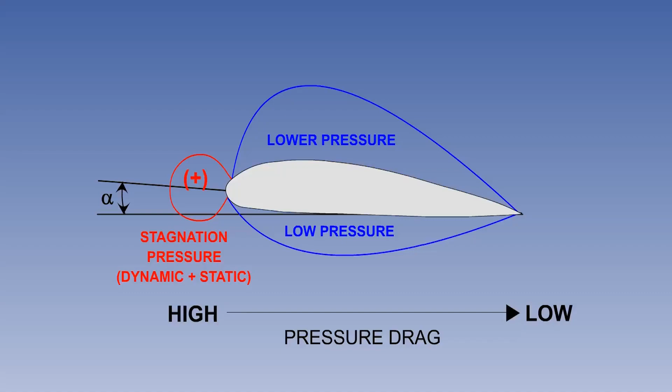We can now examine what happens to the pressure pattern as the angle of attack changes, starting with low angles.

With an alpha of -4 degrees, the drop in pressure is the same above and below the section. There is no differential, and therefore no lift. This is known as the zero lift angle of attack.

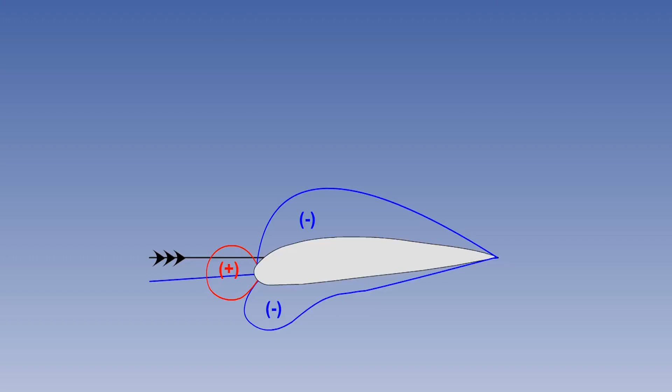At 0 degrees alpha, there is a pressure decrease over the upper surface compared with free stream flow, with a smaller decrease on the underside. Even at small angles of attack, between -4 and 0, a positively cambered section will produce lift. The positive pressure at the leading edge is dynamic, or in this context, stagnation pressure.

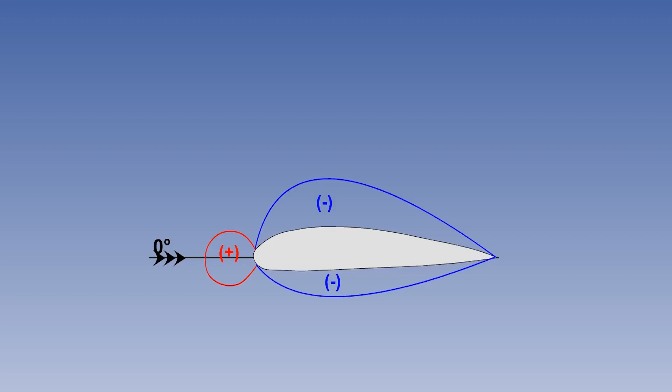As angle of attack is increased, here to around 4 degrees, the lift force is increased because of the greater acceleration of the upper surface flow in the reduced cross-sectional area of the local stream tube. The low pressure peak moves forward as the angle of attack increases.

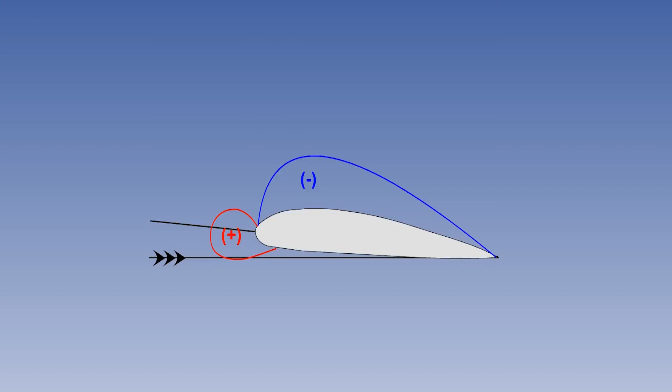At 8 degrees, the peak is higher and further forward, and nearly all the lift is from the upper surface. But the increased frontal area means that stagnation pressure is adding to the rearward force.

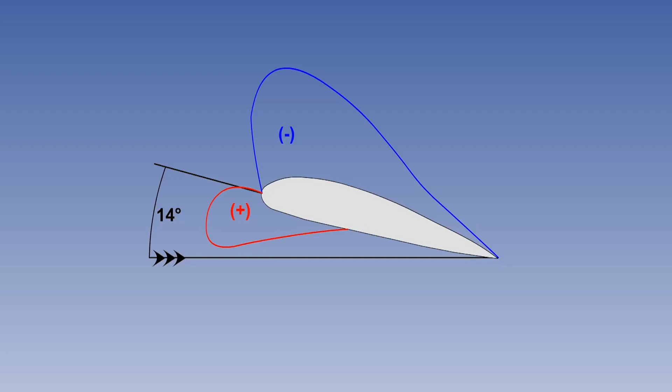At about 14 degrees, the low pressure peak is well forward, and the high pressure area under the wing is greater, adding to both lift and drag.

The contribution to the rearwards force is due to the pressure gradient, which is a change in pressure over distance. The greater the pressure difference, the steeper the gradient.

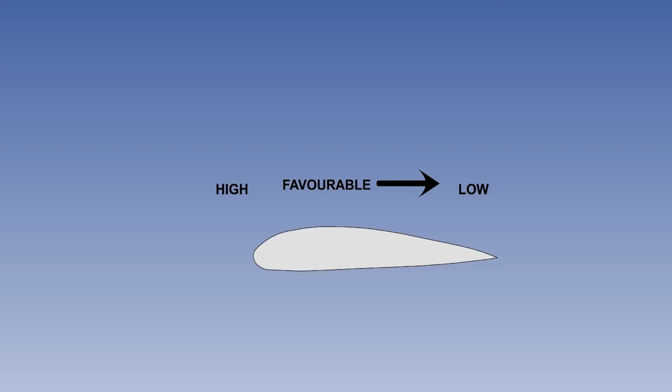As air tries to flow from high to low pressure, a favourable gradient is one in which the pressure is falling in the direction of the airflow, and an adverse gradient is one in which it is rising in the flow direction, such as between the point of minimum pressure over the aerofoil and the trailing edge.

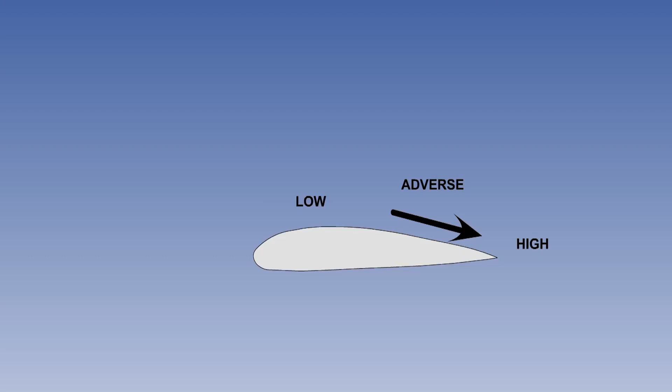The gradient increases with angle of attack. As the angle of attack reaches about 16 degrees, the adverse pressure gradient is such that the air is trying to flow forward from the trailing edge against the airflow, preventing the previously smooth streamline flow from following the surface of the aerofoil, and causing the low pressure area over the upper surface to collapse suddenly.

Any pressure differential remaining is due to the pressure increase on the underside only. This condition is known as the stall, described fully in a later lesson.

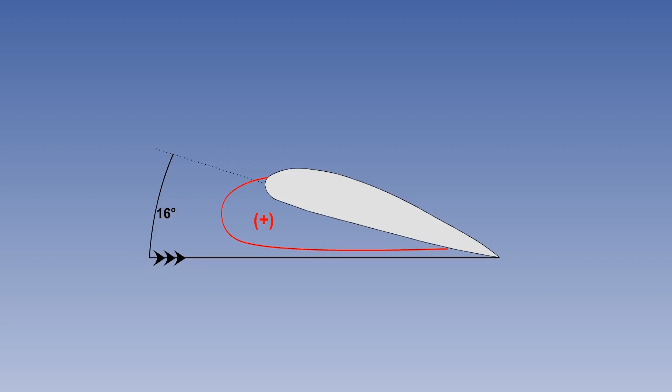The whole surface of the aerofoil contributes to lift, but the point along the chord where the lift is effectively concentrated is termed the centre of pressure. The location of the centre of pressure, or CP, is a function of camber and lift coefficient, which depends partly on angle of attack.

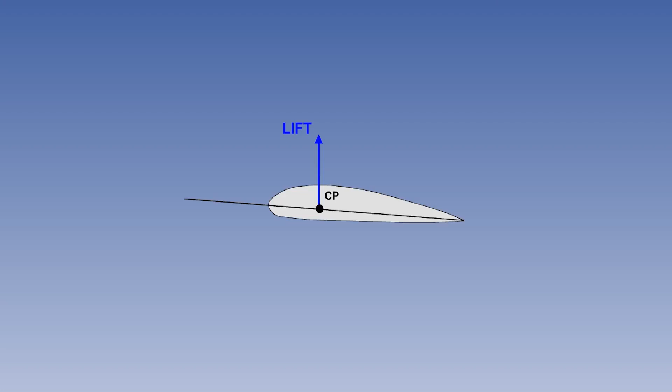As the alpha increases from 0 to 16 degrees, the upper peak of low pressure, or suction, will move forward, taking the point of concentration of lift, the CP, with it.

The magnitude of the lift force also increases with alpha, until the stall is reached, at which point the lift force decreases abruptly, and the CP moves back along the chord. Note that the CP is at its most forward point, where lift is at its maximum, just before the stall.

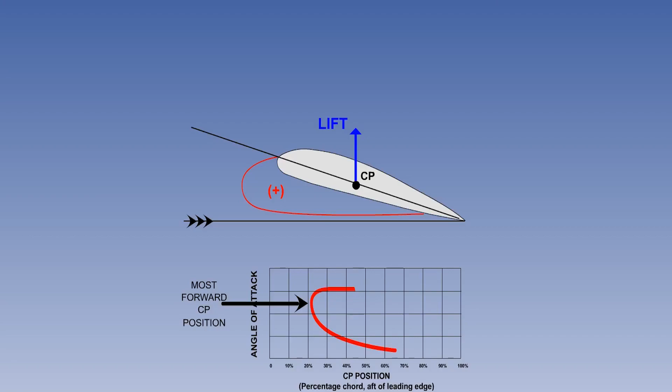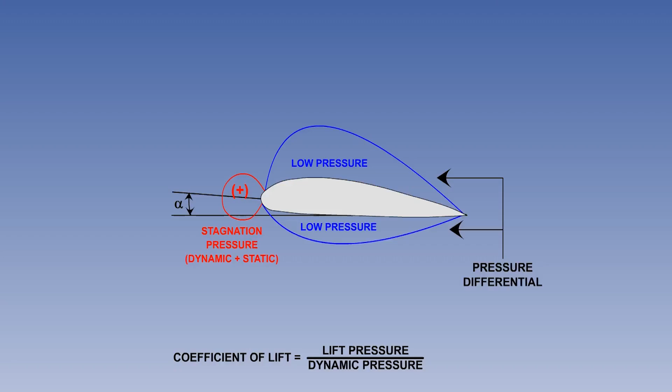A coefficient is a number without unit or dimension expressing a degree of magnitude. An aerodynamic force coefficient is a common denominator for all aircraft, regardless of weight, size or speed, and is a ratio between the average aerodynamic pressure and the airstream dynamic pressure.

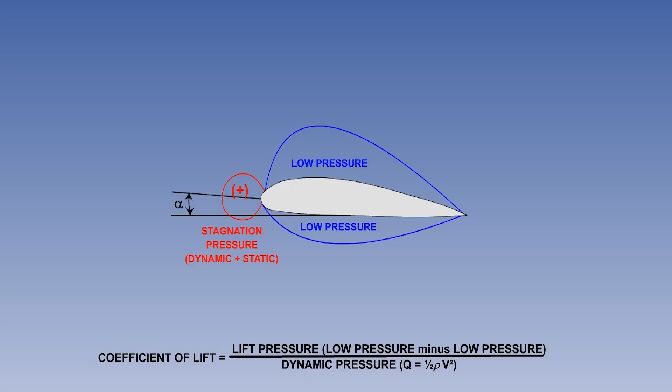By this definition, a lift coefficient, or CL, is the ratio between lift divided by wing planform area, or lift pressure, and dynamic pressure. A drag coefficient, CD, is the ratio between drag divided by wing area and dynamic pressure.

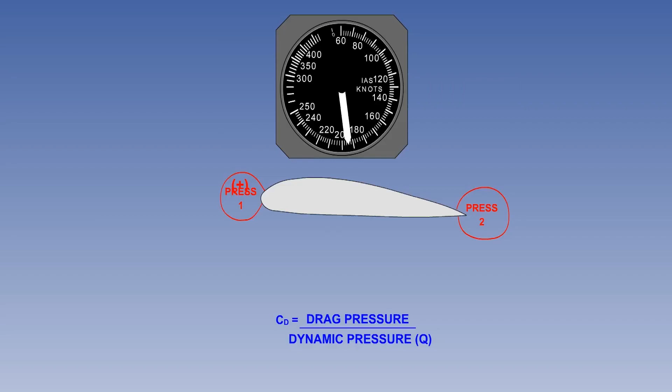As speed increases, assuming a constant density, CD will remain constant, since drag pressure and dynamic pressure are increasing in the same proportion. We need to use coefficients of aerodynamic force, as they provide an index of the force, independent of area, air density or velocity, being derived from the relative pressure and velocity distribution.

They are influenced only by the shape of the surface and angle of attack, since it is principally these factors that determine the pressure distribution.

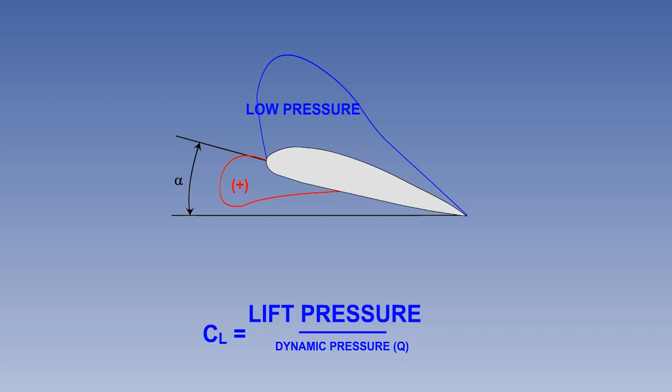The last section of this lesson covers aerodynamic pitching moments. To refresh your memory, a moment is defined as the product of a force and the distance through which it acts. In the case we are considering, the moment is purely a leverage, and no movement is involved.

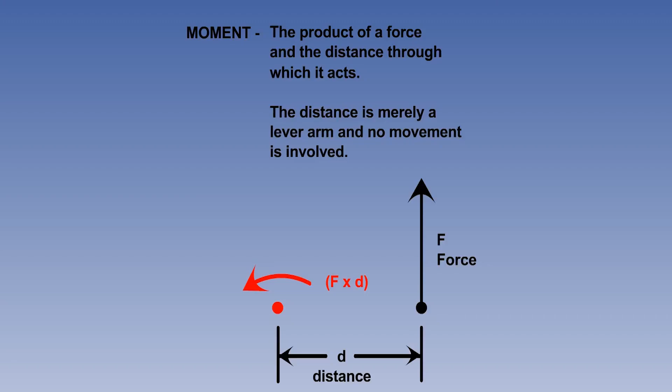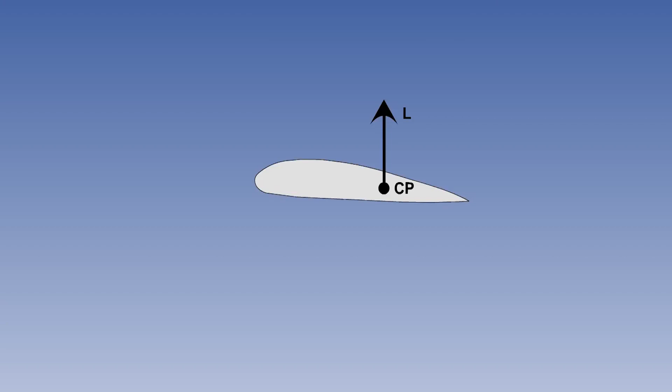The distribution of pressure over a surface is the source of aerodynamic moments as well as forces. There are two ways of considering the effects of a changing angle of attack on the pitching moment of an aerofoil: either by measuring changes in magnitude of lift through a moving centre of pressure, or more simply, through a fixed aerodynamic centre. As the angle of attack increases, the CP moves forward and the magnitude of lift increases, and vice versa. This results in a changing force with a changing point of application.

The aerodynamic centre, or AC, is a fixed point on the chord line, and can be defined as the point where all changes in the magnitude of lift effectively take place, and the point about which the pitching moment will remain constant at normal angles of attack. For subsonic airflows of less than Mach 0.4, the AC is located at the 25% chord point, regardless of camber, thickness or angle of attack.

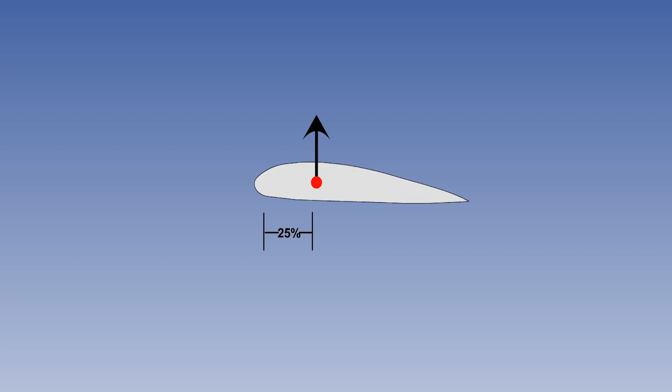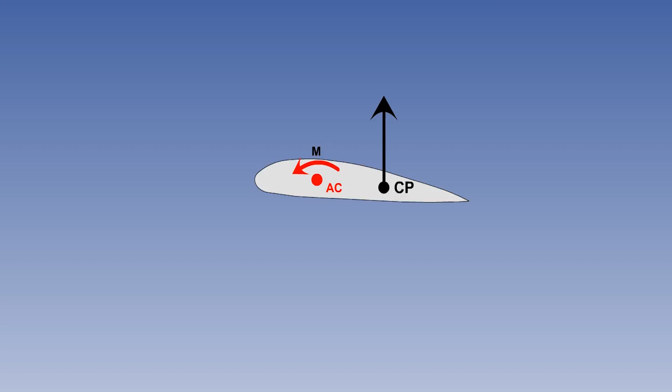The AC is an aerodynamic reference point, used for examination of the theory of incompressible airflow, and is most directly applicable to longitudinal stability, as you will see later in the syllabus. There is a nose-down pitching moment about the AC, which is a product of the lift force at the CP and the arm between the CP and the AC.

Since an increase in alpha will not only increase the lift force, but also shorten the lever arm as the CP moves forward towards the AC, the moment about the AC remains the same at any angle of attack within the normal flight range.

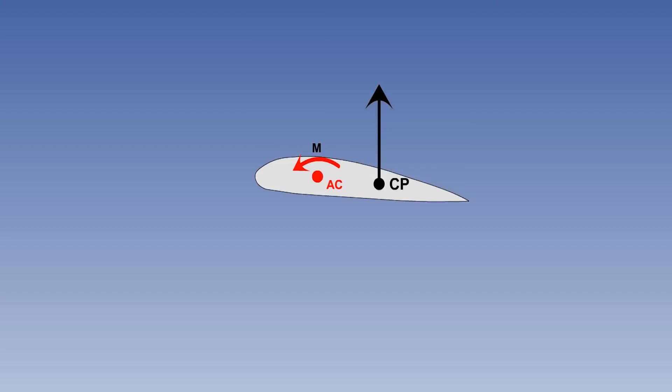With a symmetrical aerofoil at 0 alpha, the upper and lower forces are equal and symmetrically distributed. With an increasing angle of attack, the upper surface force increases and the lower force decreases. A change in the magnitude of the lift forces has taken place without a change in the position of the centre of pressure, which is a characteristic of symmetrical aerofoils. Thus, the pitching moment about the aerodynamic centre will be 0 at normal angles of attack, which is one of the big advantages of such aerofoils.

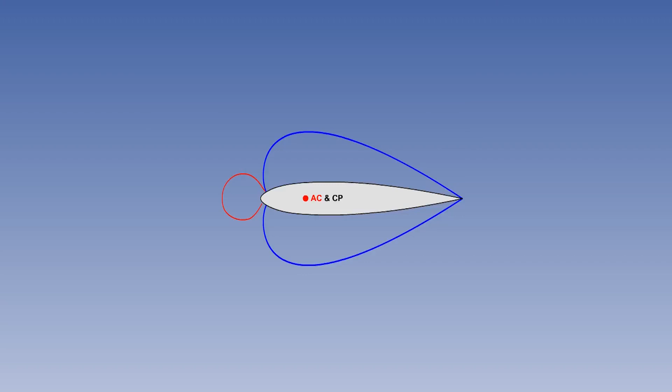To summarise the significant points of this lesson, we can start with the main things affecting airflow pattern, and consequently lift and drag. It will depend on angle of attack, airflow cross-sectional area change, aerofoil shape - that is, thickness and camber - again, airflow cross-section, air density, air mass flow decreasing with greater altitude, and velocity, air mass flow changing with TAS.

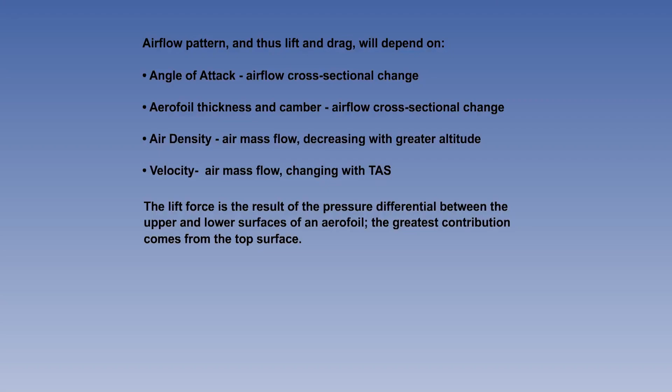The lift force is the result of the pressure differential between the upper and lower surfaces of an aerofoil. The greatest contribution comes from the top surface. Any contamination, particularly ice, or deformation of the upper leading edge surface can seriously disrupt the airflow acceleration, and hence the magnitude of the lift force.

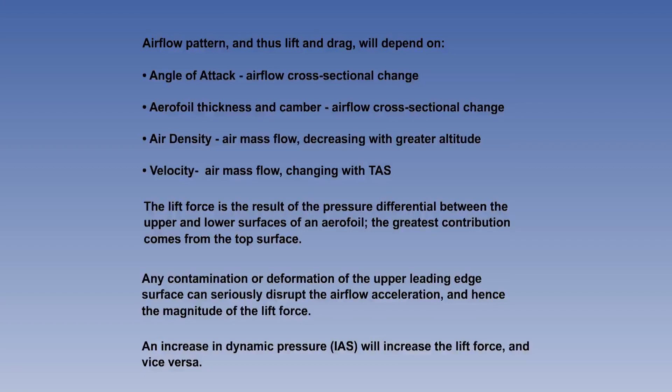An increase in dynamic pressure with indicated airspeed will increase the lift force, and vice versa. An increase in angle of attack, alpha, will increase the lift force, and vice versa, over the normal flight range of 0 to 16 degrees. The centre of pressure of a cambered aerofoil moves forward as alpha increases, whereas the CP of a symmetrical aerofoil does not, within the normal range.

Throughout the normal alpha range, the aerofoil's pitch-down moment about the aerodynamic centre, or AC, will remain constant. The AC is at the quarter chord position for subsonic flow of less than Mach 0.4. The coefficient of lift is the ratio between lift per unit wing area and dynamic pressure.

As alpha increases from -4 degrees, the leading edge stagnation point moves from the upper surface around the leading edge to the lower surface. The greatest positive pressure occurs at the leading edge stagnation point, where the relative flow velocity is 0.

Form, or pressure, drag is the result of the pressure differential between the leading and trailing edges of the aerofoil. An increase in dynamic pressure, that is, indicated airspeed, will increase form drag, and vice versa. The coefficient of drag is the ratio between drag per unit wing area and dynamic pressure.